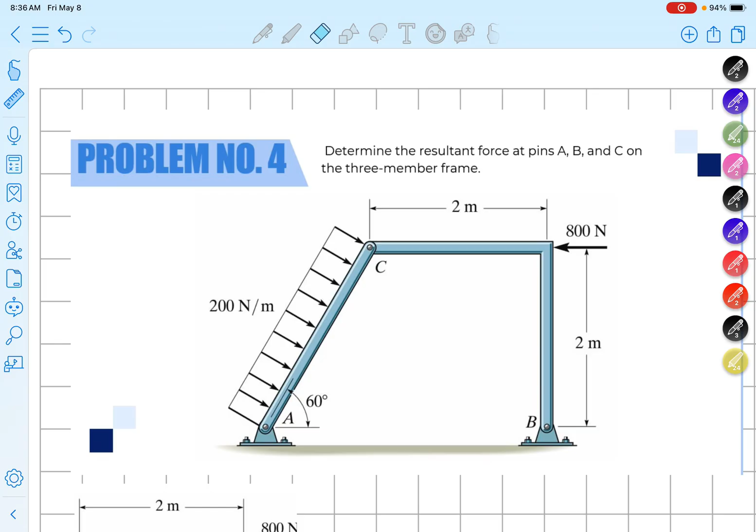If you look carefully, let's find first the 2-force members. In this case, is member CB a 2-force member? Actually no, because along its span there's an 800 Newton force applied. So technically, that's not a 2-force member.

How about member AC? Is this also a 2-force member? No, because along this length there's a 200 Newton per meter distributed load applied. So technically, that's not a 2-force member either.

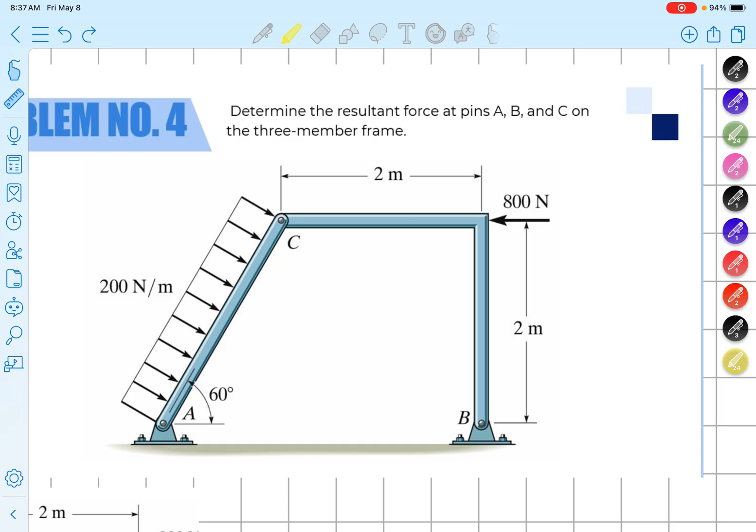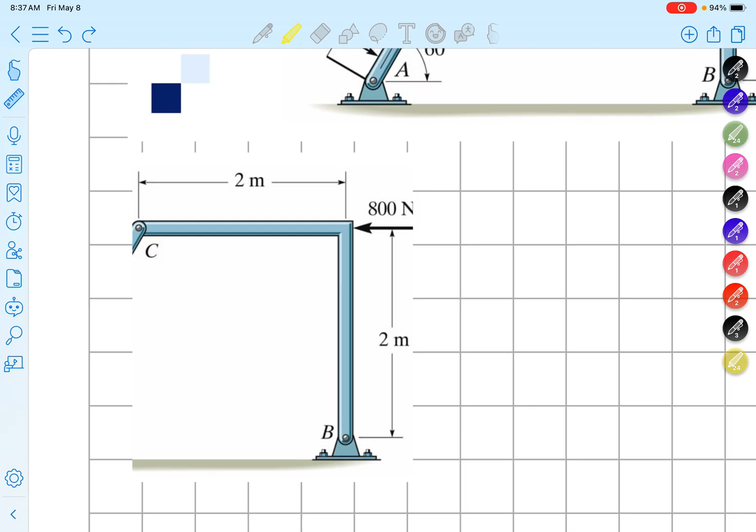Oftentimes guys, in the method of members, it's hard to analyze the direction of the support reactions because it depends on the loadings. So we're more on assumption. But always make sure that whatever you assume first, you assume the same in the next segment, but in the opposite direction.

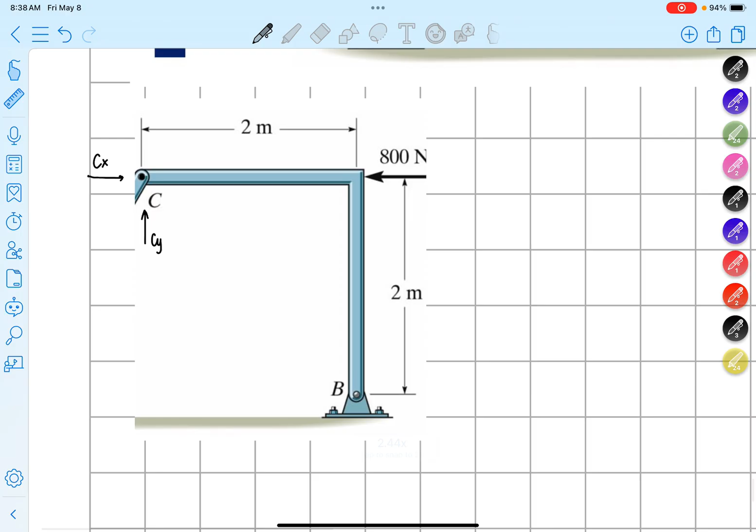RBY, let's say pointing upward. RBX, let's say pointing to the left. But this is pure assumption only.

So in this case guys, can we proceed now? Okay, so maybe we can now, so we can create our equations.

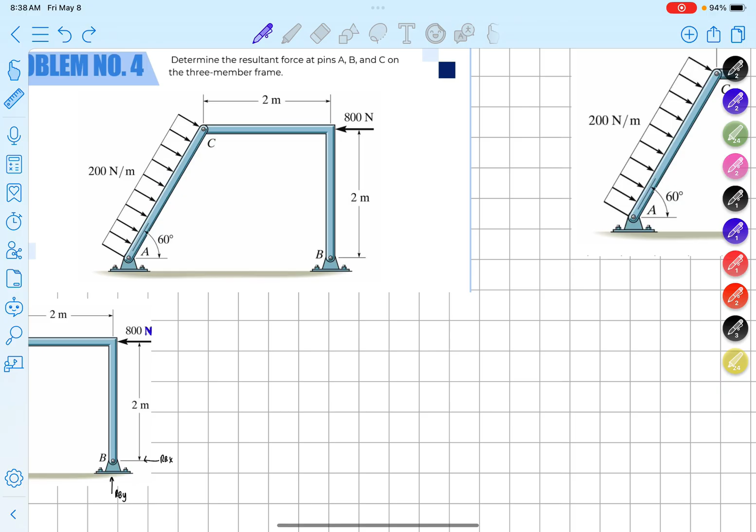Okay, so in this case, can we take the moment at B? Taking the summation of moment at B equals 0. Technically guys, let's consider clockwise as positive. So 0 is equal to...

CY, right? What's the moment arm? 2. How about CX? That's positive too since it's also clockwise, right? CX multiplied by 2. The 800 is negative 800, since that's counterclockwise, multiplied by 2.

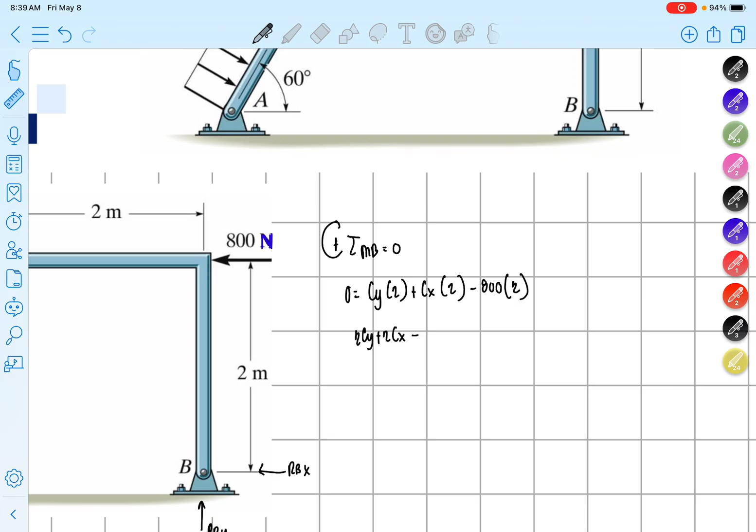So arranging the equations, this is 2CY plus 2CX minus - let's just equate it. Let's transpose this negative 1600, right? 800 times 2 is 1600. So that becomes positive 1600 on the other side of the equation.

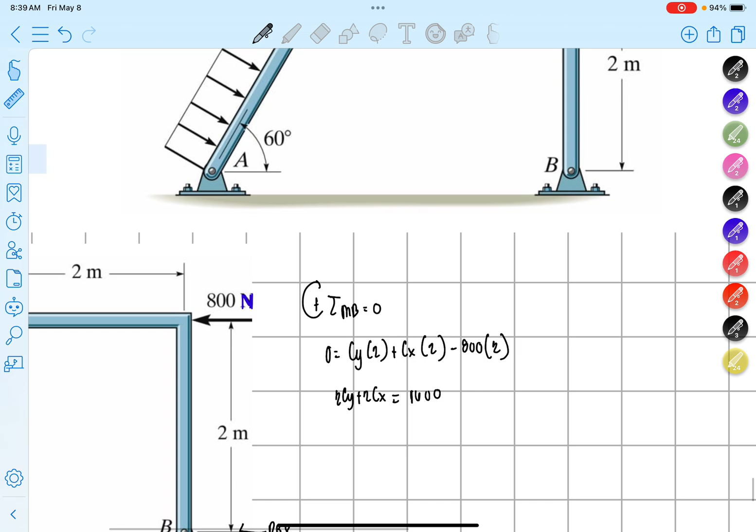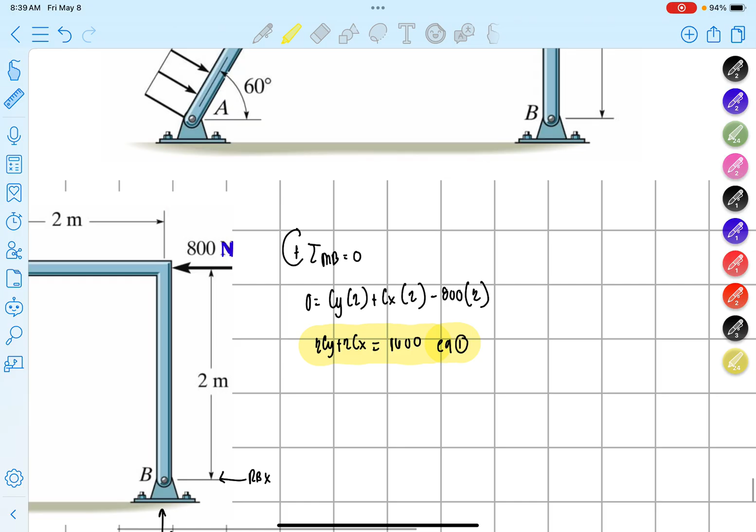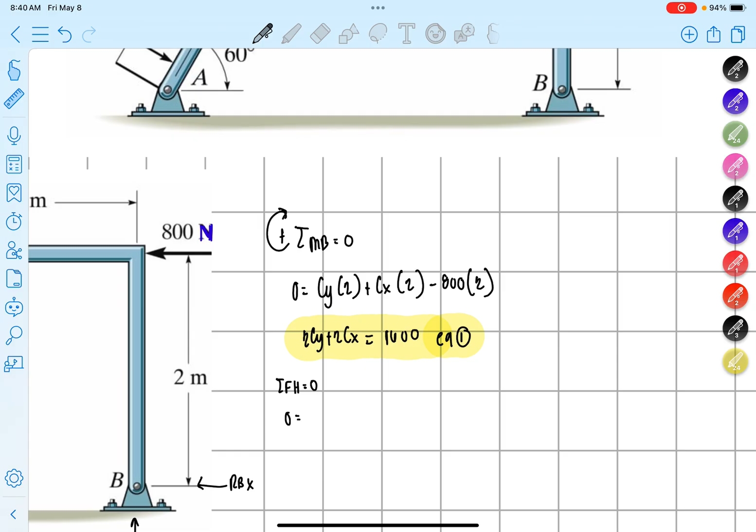Okay, next, we're done taking the moment. Now we have to take the summation of forces horizontal equal to 0. Which is 0 equals - what's involved there? We have CX, positive CX, minus RBX. Let's say minus 800, horizontal.

So in this case guys, we have RBX. If we solve for RBX, this is simply equal to CX minus 800. We just transposed, right? You can consider that equation 1, but let's simplify. So this is our equation 2, for example.

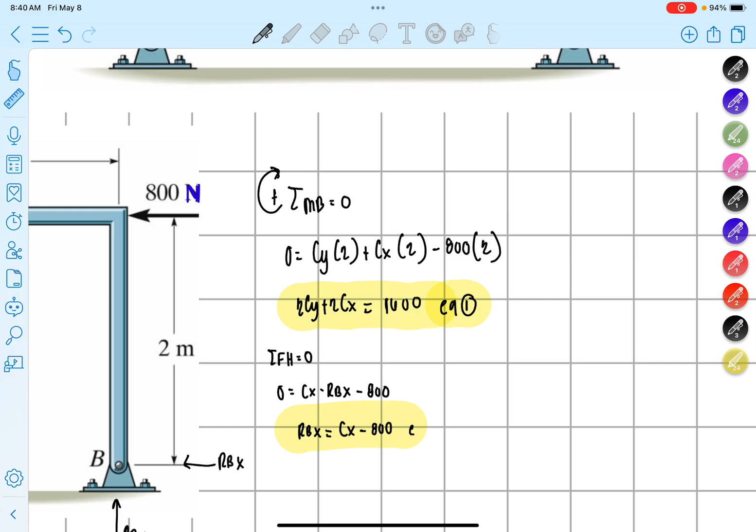Okay, next, let's take the summation of forces vertical equal to 0. Considering 0 equals RBY. Nothing else involved there. Plus CY. That's our assumption.

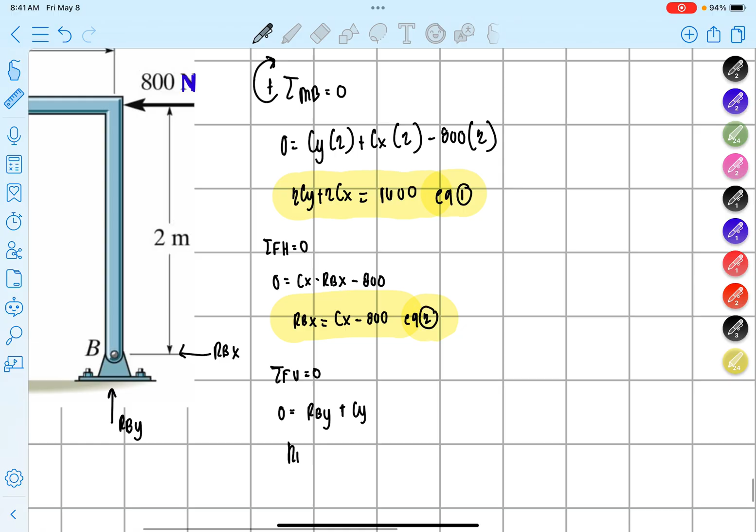Okay, so in this case guys, RBY is equal to negative CY. So that means this is our equation 3.

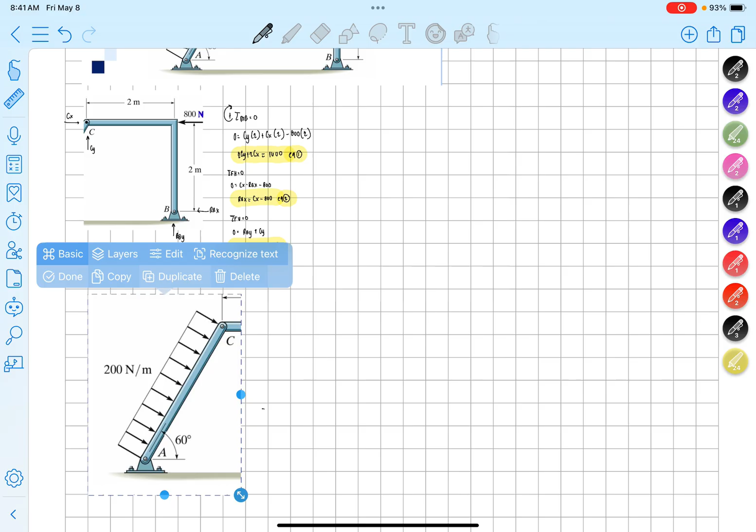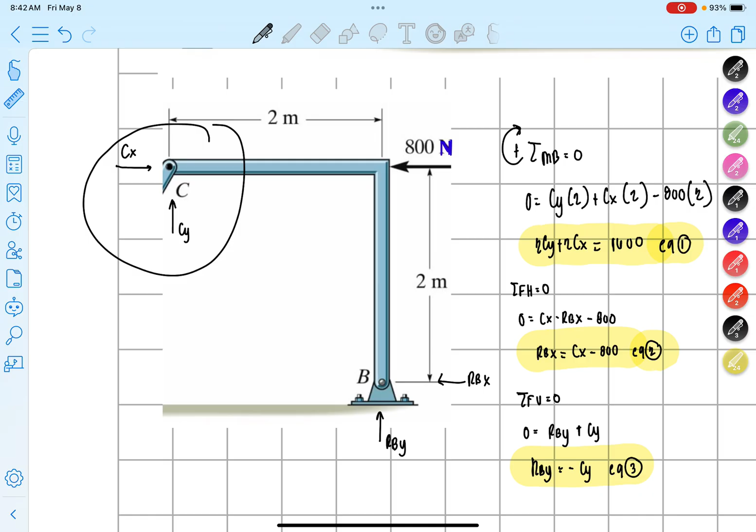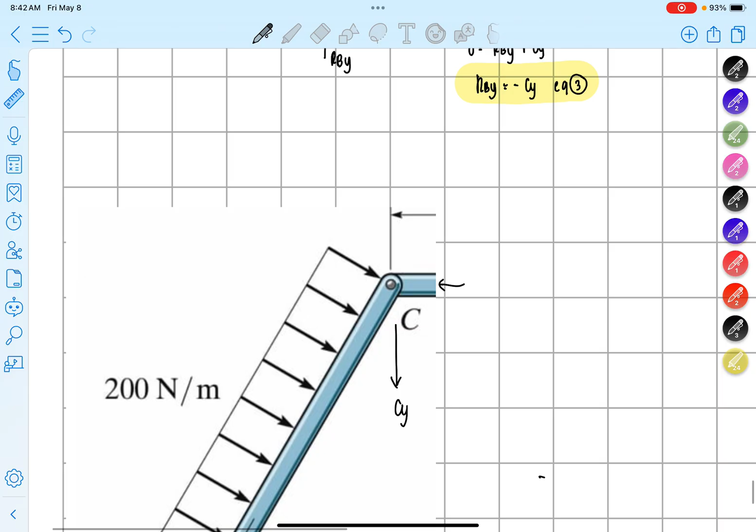So, in this case, ang sabi ko sa inyo kanina, kung ano inassume mo dito, kung ano inassume mo dyan, di ba, by transfer of loadings, ililipat mo yan sa kabila, dapat opposite in direction na yan. So, in this case, guys, pataas si CY, pakanan si CX. In this case, pababa si CY, pakaliwa si CX. Tama? Nagkakaintindihan?

Ngayon, eto na. Dito na medyo magkakagulo. Meron kasi nagtanong sa akin, Sir, bakit po ba, wait lang, ayusin ko lang si CX. Sir, bakit po ba yung naka-incline na loadings na ganun, bigla na lang, hindi na po natin kinomponent, bigla nyo na lang pong times sa distance.

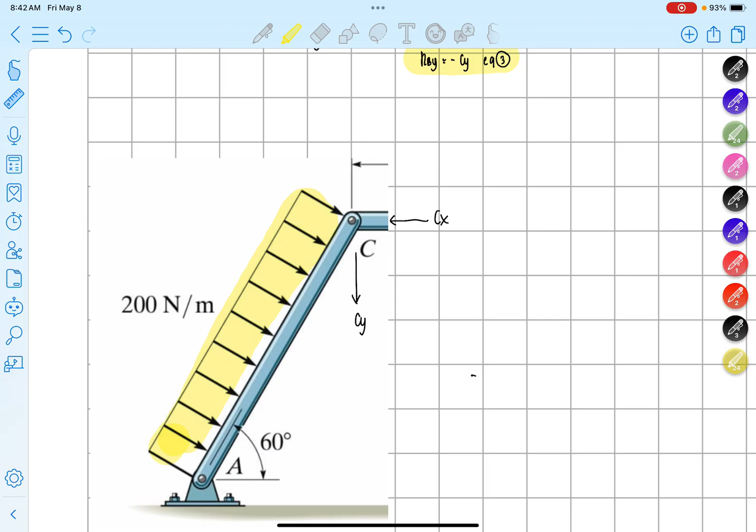So, etong load na yan, makinig etong load na to, di ba area lang yan? So, ibig sabihin, ang height ng area na yan is etong 200 Newton per meter. Ang magiging base niyan, technically, is eto dapat.

Yan, distance na yan. Ngayon, para makuha natin yan, ano ba yung height na to? Tapos, ano ba yung base na to? So, kunin natin yan. So, ibig sabihin, may height ka doon na 2 meters, di ba? Meron kang 2 meters. So, pagpalagay natin, this is your 2 meters.

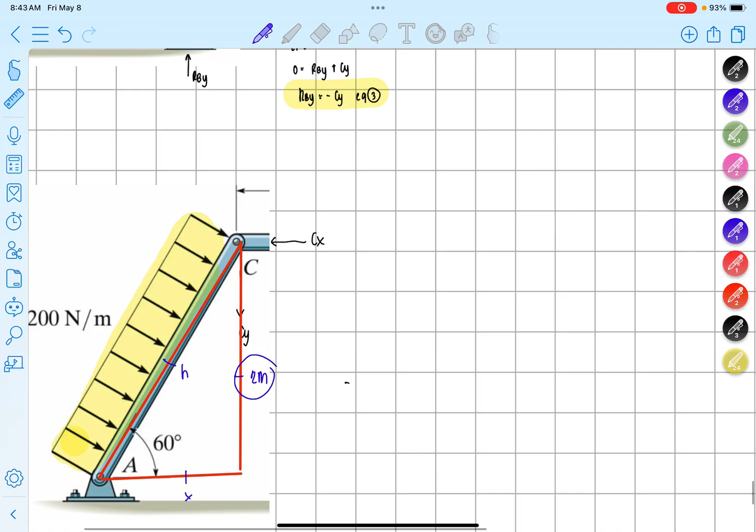Ito ngayon si X, hindi natin alam yan. Ito ngayon si H na lang siguro. Okay? In this case, guys, isolve natin si H saka si X. Pagka sinolve natin si X, di ba, meron tayong opposite, may angle tayo, at saka meron tayong adjacent. So, technically, that's sine. Okay?

So we have sine of 60 equal to opposite na 2 over, wait lang pala. H pala yung makukuha natin dyan. So, sorry. So, we have this sine theta opposite over adjacent H, over the hypotenuse H. So, we have the H.

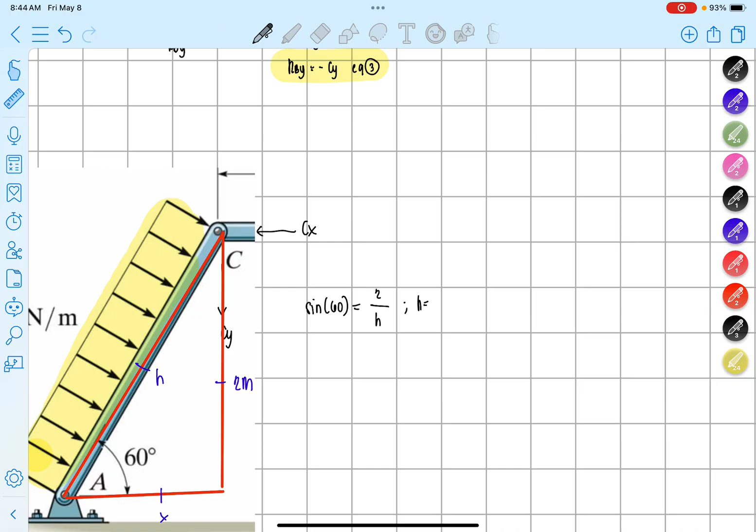So, lang yan. This is opposite ng angle. Ngayon, makukuha natin si H equal to, let's say, mangyayari dito is we have 2 divided by sine of 60. So, this is 2.31. So, this is 2.31 meters. So, this is equal to 2.31 meters.

Ngayon naman, para makuha natin si X, di ba ang gagawin natin, meron tayo, if this is your opposite, this is your adjacent, anong gagamitin natin? So, we have TOA. So, we have tangent of 60 is equal to 2 over X naman. So, yung X naman natin dito is equal to 2 divided by tangent ng 60.

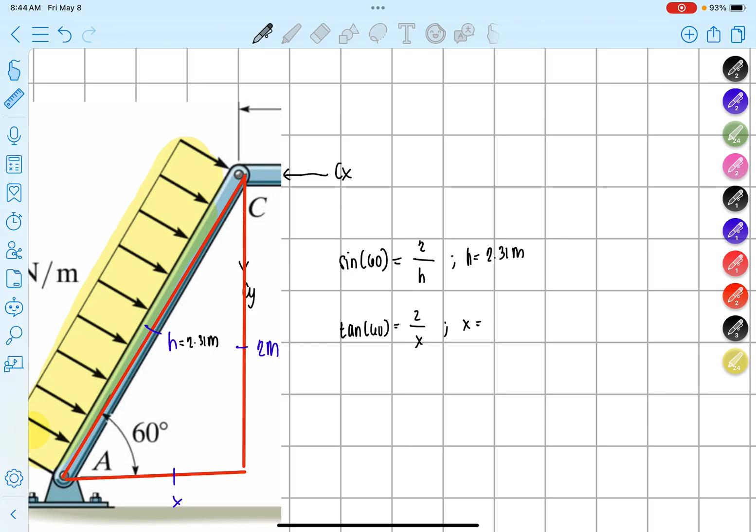This is equal to 1.155. So, let's say 1.15 na lang. 1.15 meters. So, this is equal to 1.15 meters. So, in this case, okay na tayo.

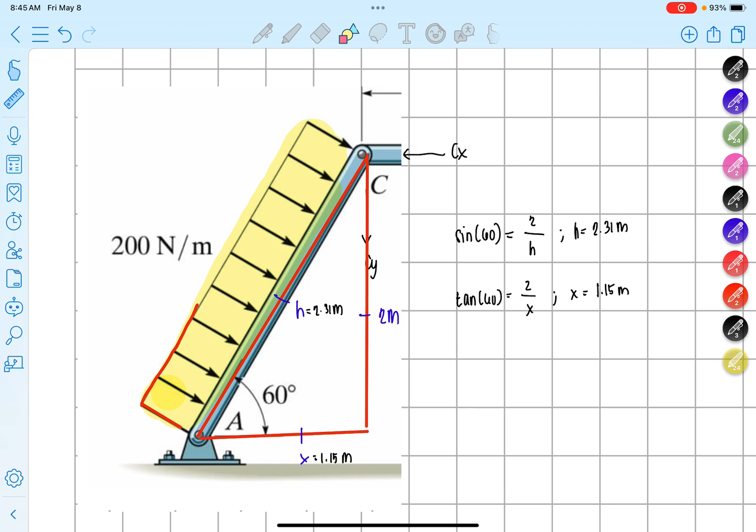Meron na tayong, ngayon, hindi ba guys, that yung resultant nga na to, tulad ng sinasabi ko, di ba yung resultant na to is simply just the area? Di ba area lang yan? Like guys, lagi tatandaan na nakapaling lang yan. Pero yung height niyan is ito pa rin yan, 200 Newtons per meter. Meaning ba, sir, pag kinuha ko yung area niyan, yung magiging resultant ko ba is nandito?

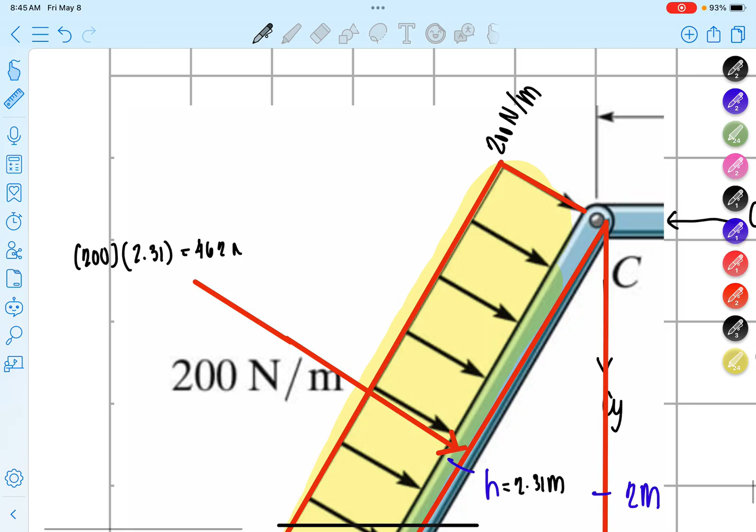Yes guys, nandyan ngayon yan. So, ibig sabihin pala, para makuha natin resultant, kunin lang natin area, we have 200. Ano yung magiging base niya na nga? Yung H natin bale, which is 2.31. So, this is equal to 200 times 2.31. This is equal to 462 ngayon. This is 462 Newton. So, yan yung resultant natin for that uniformly distributed load.

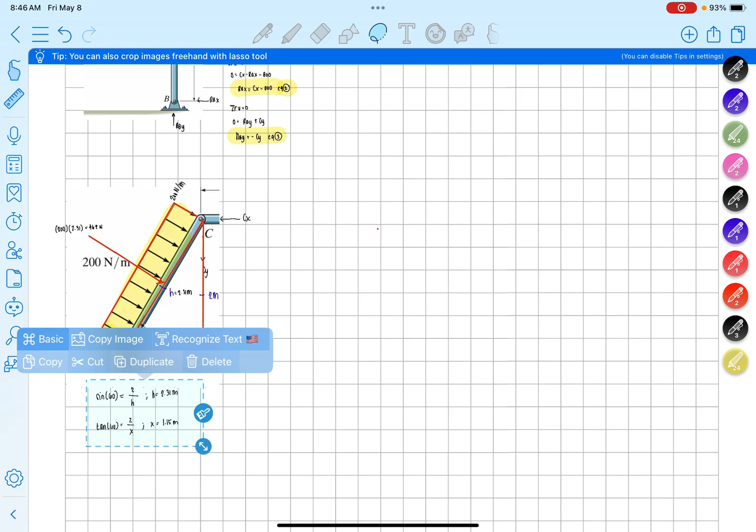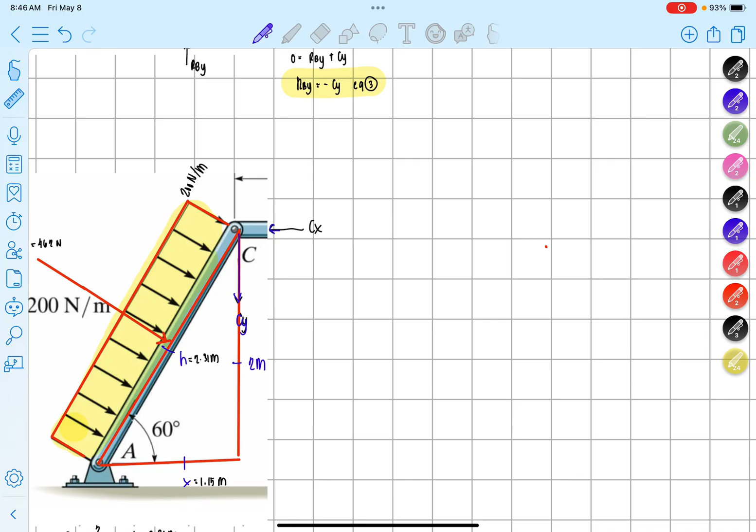So, okay na tayo dyan. Okay? Siguro, ilipat ko lang to para makapag-take na tayo ng moment. Pakita ko lang dyan para hindi ko naman din aalisin. So, para makapag-take na tayo ng moment, nawala pala yan ako dito. Wait lang. This is your CY and this is your CX. Ayan na, ayan yung CYCX natin.

Now, if we're going to take the moment at A, okay, if you're going to take the summation, moment at A equal to 0. Ito naman, mag-assume tayo ng direction dito. I-assume ko na lang siguro na pag ganun din, we have the RAY. Ito maganda rin naman, pakita ko na yung ina-assume lang din.

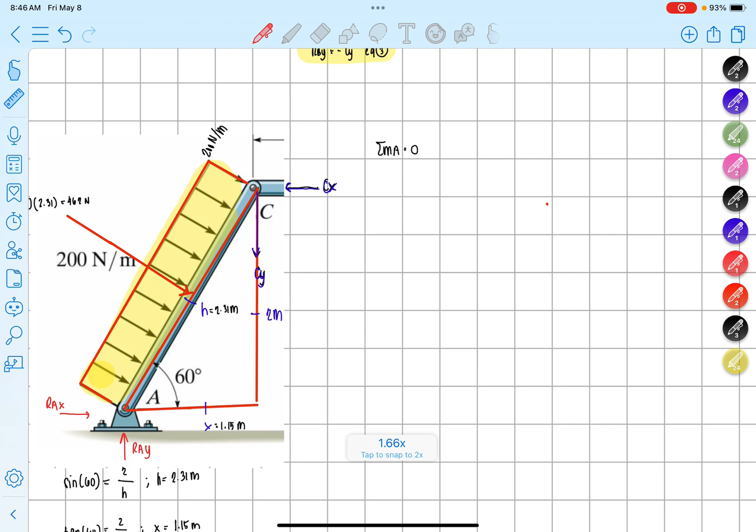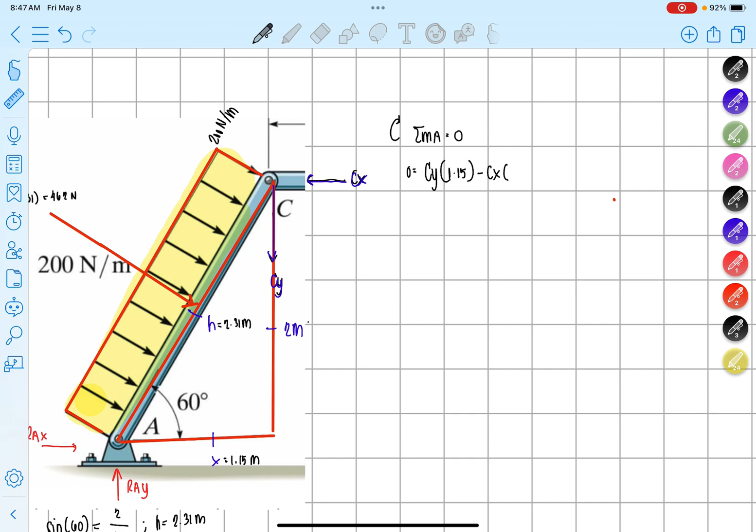RAX. So now, kapag nag-take tayo ng summation moment at A is equal to 0, considering clockwise positive, regardless kung ano man yung piliin nyo dyan, okay lang. So 0 is equal to CY, multiplied by a moment arm ng CY ngayon na 1.5... tama, so we have 1.15 pala. How about the CX? Si CX is iikot pa kabila, therefore negative CX multiplied by distance na 2.

Okay, now how about yung ating 200 Newtons per meter? Diba nakuha na natin guys na 200 Newtons per meter is 462 yung resultant. Ang gamitin na lang natin guys na perpendicular distance is eto, ibig sabihin kalahati po ng 2.31. Yes, kalahati ng 2.31. Since iikot yan clockwise, so positive 462, nakuha na natin resultant ton, multiplied by 2.31 over 2. So this is equal to, masolve ba natin?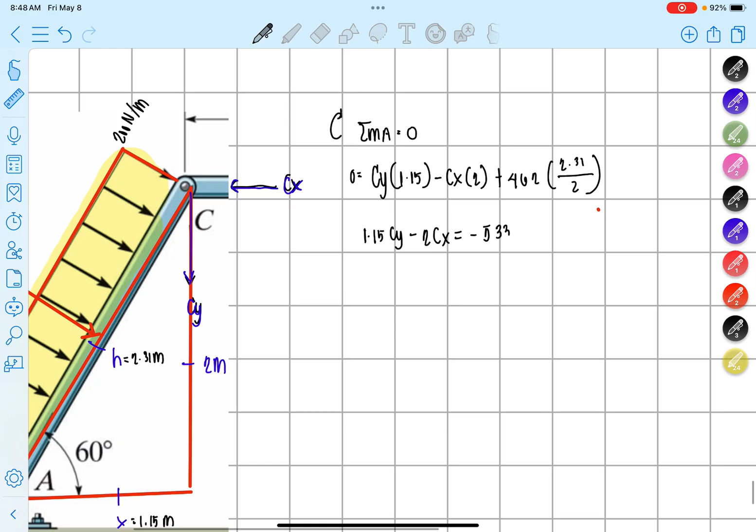So hindi pa pala, so we have 1 point, if we're going to simplify, we have 1.15 cy minus 2cx. Tapos lipat natin sa kabila na equation yan, magiging negative yan. So we have 462 times 2.31 over 2, this is equal to 533.61. Since nilipat natin siya sa kabila ng equation, ang tendency niyan pag negative na yan, so negative 533.61. So this is our equation 4. Equation 4 na. Ilan pa ba equation yan?

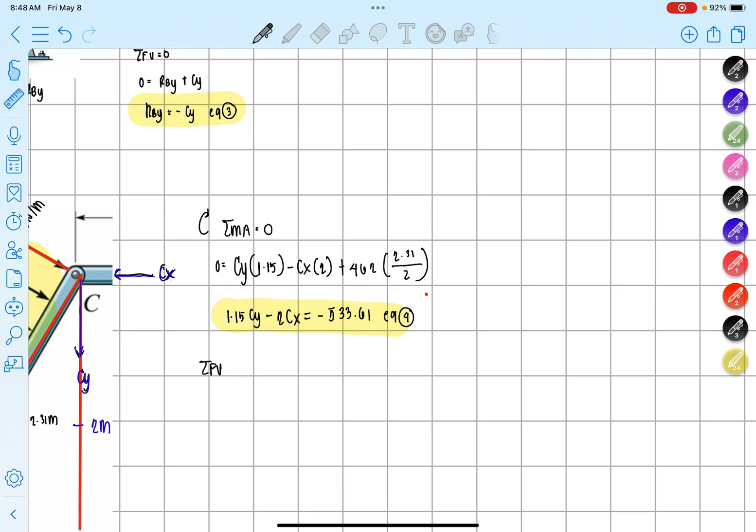So patience, okay mabilis na lang to pag nayari na natin. Ibig sabihin, next naman is summation forces vertical is equal to 0. 0 is equal to, ano yung mga nandyan? So we have RAY positive, tama, minus CY, tama ba? Ngayon sir, diba magkakaroon po ng components to?

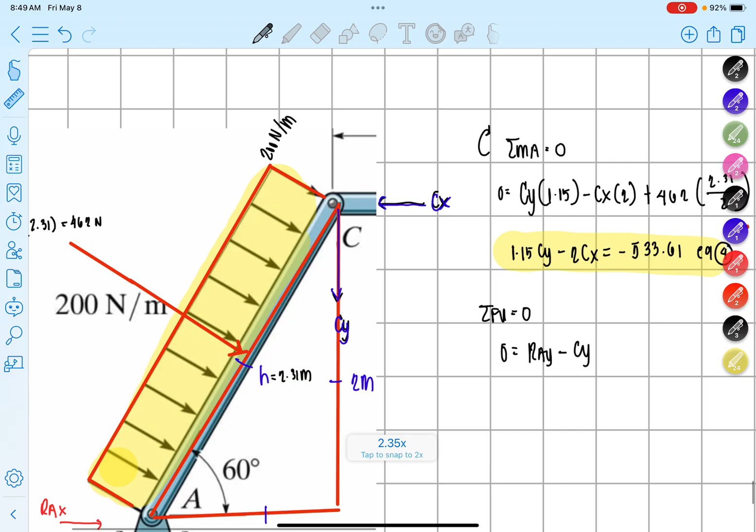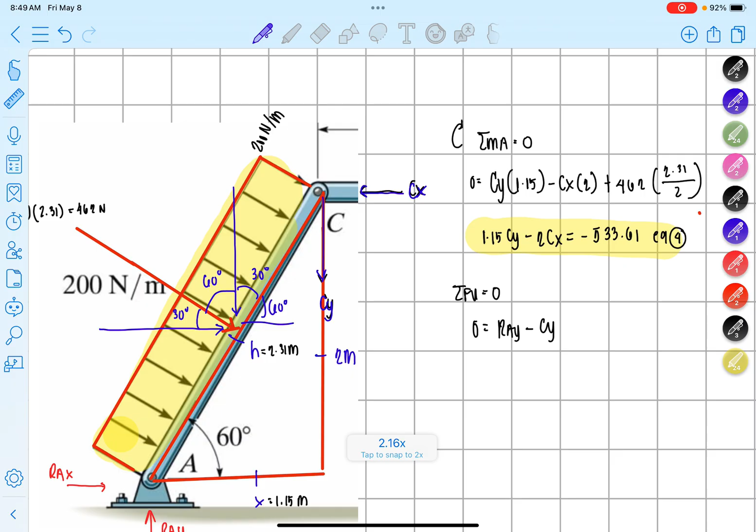Tama? So ibig sabihin, kukunin lang natin yung vertical component nung uniform distributed natin na yan. Meron naman tayong 462, pababa, minus 462, tama? Sine of 30 tayo ngayon. Tama? So okay, para hindi na kayo mahirapan, i-set ko na to as equation 5.

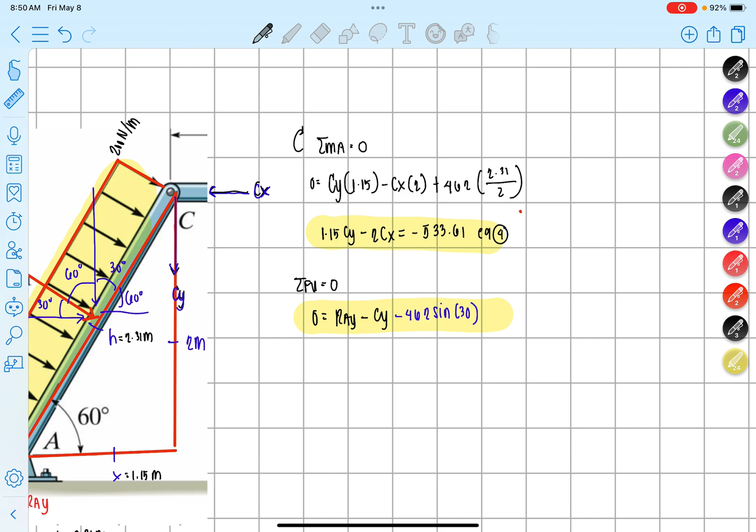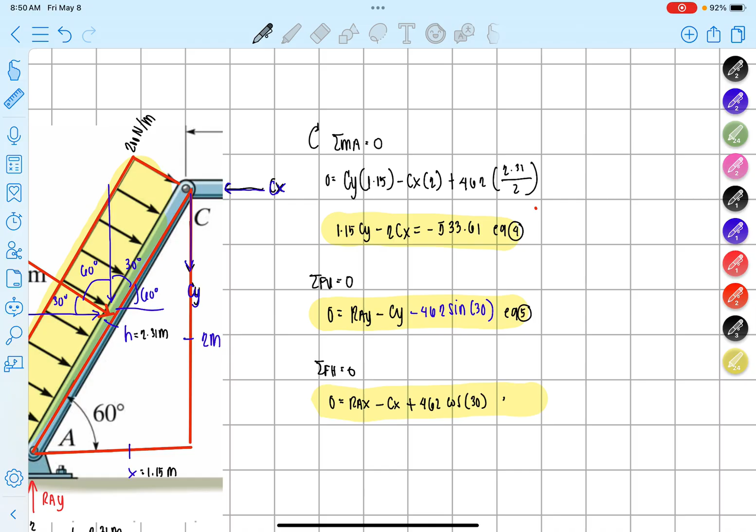Now, for summation forces horizontal is equal to 0, 0 is simply equal to RAX na pakanan minus CX and then minus or plus 462 cosine of 30. In this case, highlight ko lang ulit, this will be your equation 6. Dami hanip, no? Sabi sabihin, okay na tayo ngayon dyan. Naka-extract na tayo ng mga equation. Ayan na, pwede na tayo guys.

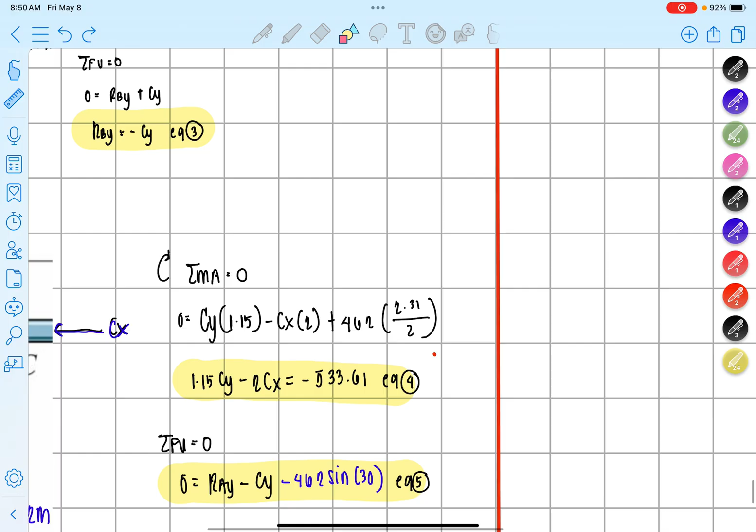Kung mapapansin nyo, magme-make sense na yung ating solution dyan. Ngayon, solve simultaneously natin. Kung mapapansin nyo, itong equation 1 natin, nawawala CY, CX. Si equation 4 naman natin, CY, CX lang din, tsaka may constant. So pwede para natin i-solve simultaneous. Okay? Solve equation 1 and equation 4.

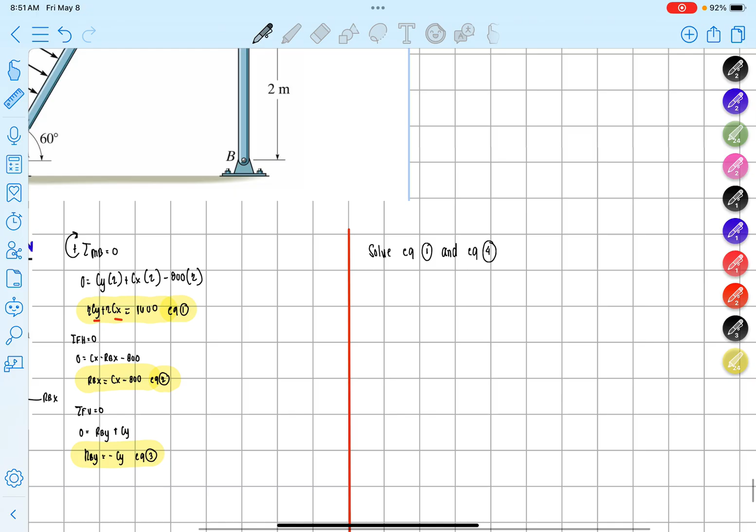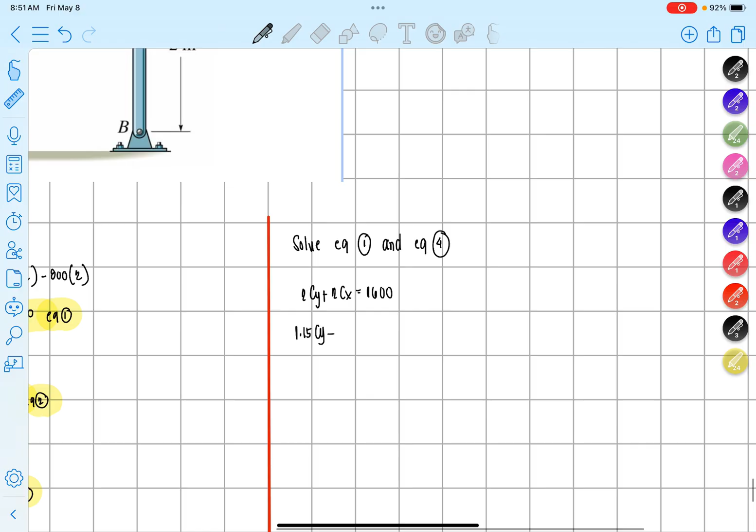Okay, so ibig sabihin, sa equation 1, rewrite natin, this is 2CY plus 2CX is equal to 1,600. That's for equation 1. Tapos we have for equation 4 na, 1.15 CY minus 2CX is equal to negative 533.61. Tama ba?

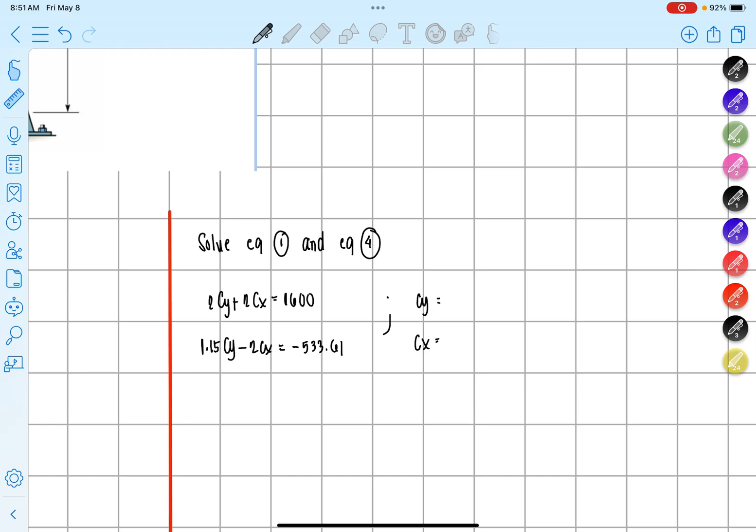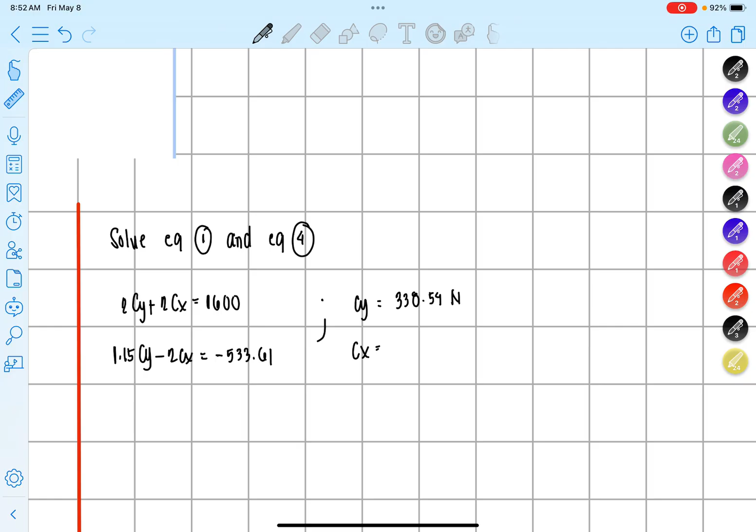In this case, masosolve na natin si CY and si CX. So kung titingnan nyo, diba, we have mode 5, 1 na lang gamitin natin. We have 2, 2, and positive 1,600. And also we have 1.15 minus 2 naman, and then negative 533.61. Ang lilitaw sa atin dito is 338.54. So ang CY natin is 338.54 Newton ba to? Yes, Newton. And then for CX natin, ang lilitaw dyan is 461.46 Newton. In this case, parehas positive, therefore tama yung naging assumption natin ng direction. Pero kung titingnan nyo, kung kukunin natin si C dyan, yung pinakasagot natin, diba this is square root pa ng 338.54 square plus 461.46 square.

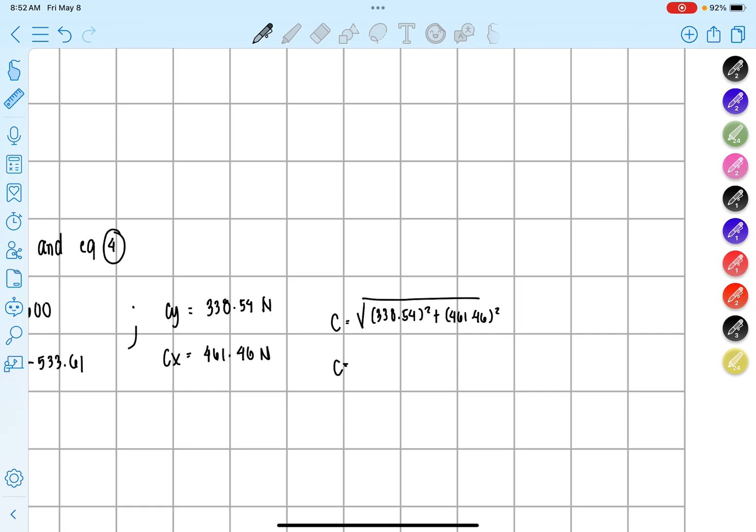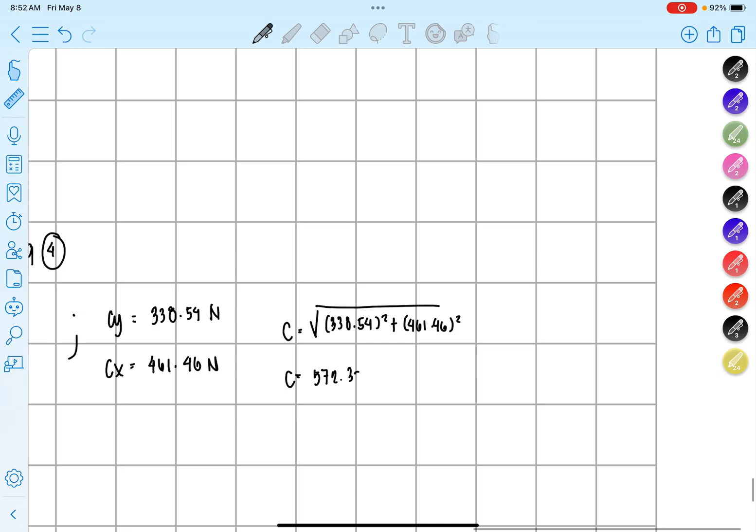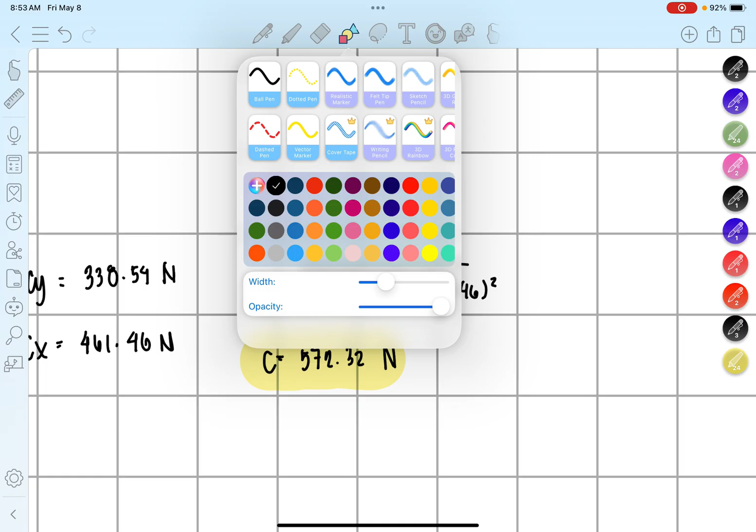So for C natin, we have mode 1, 338.54 squared plus 461.46 squared. Ang lilitaw sa atin dito is 572.32 Newton. Baka kasi nalilito kayo guys. Pagka nagkaroon ng component, hinahanap yung resultant ng support reactions, lagi nyong kukunin yung pinaka-resultant niya. Tama ba? Pag hindi mo kinuha, mali yun. So ito yung final answer natin for reaction at C.

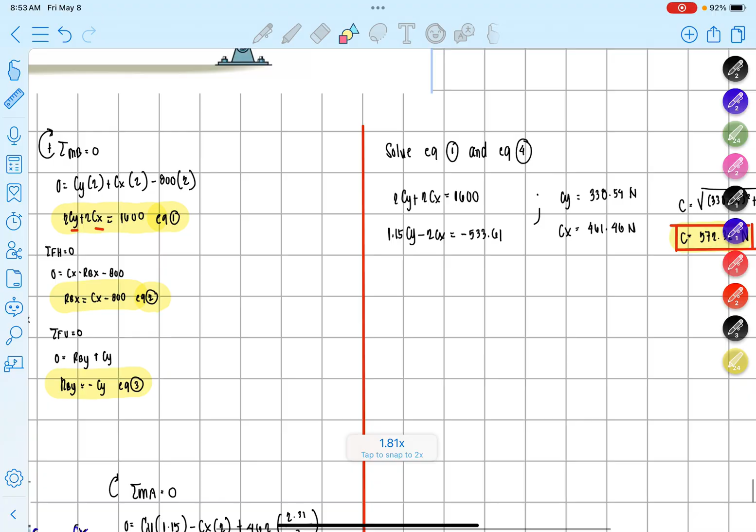Now okay na tayo sa CX saka CY. Dito muna tayo, isa-isahin natin. RB muna. Pagka nag-RB tayo guys, technically meron tayong CX, meron tayong CY for equation 3. From equation 2 naman.

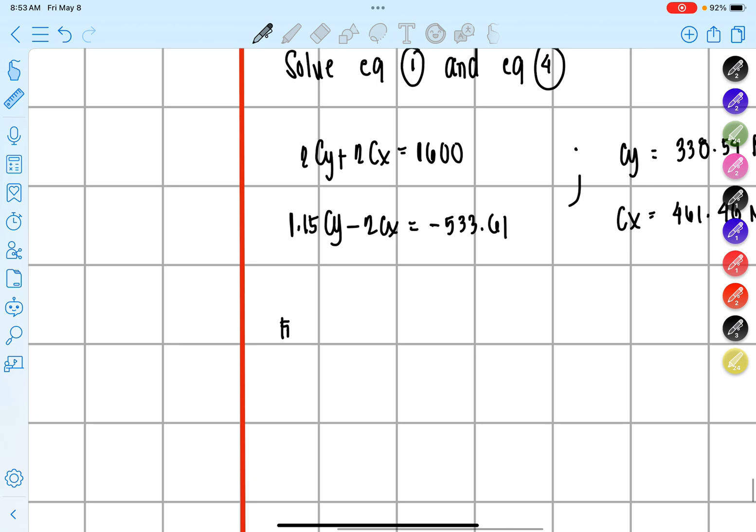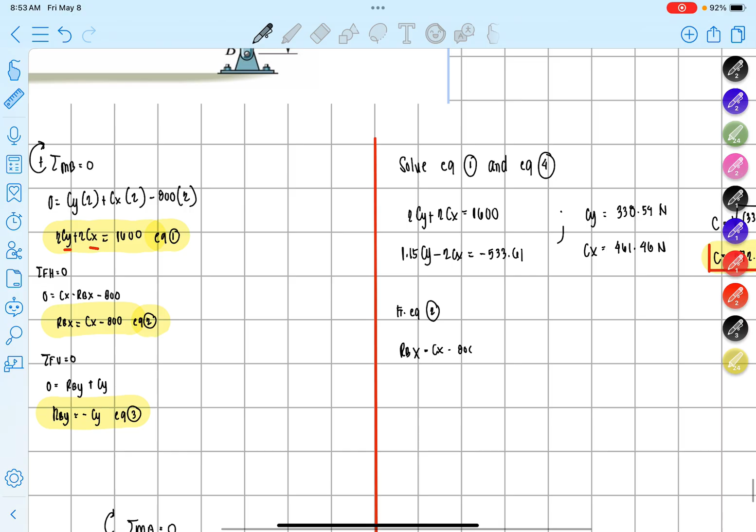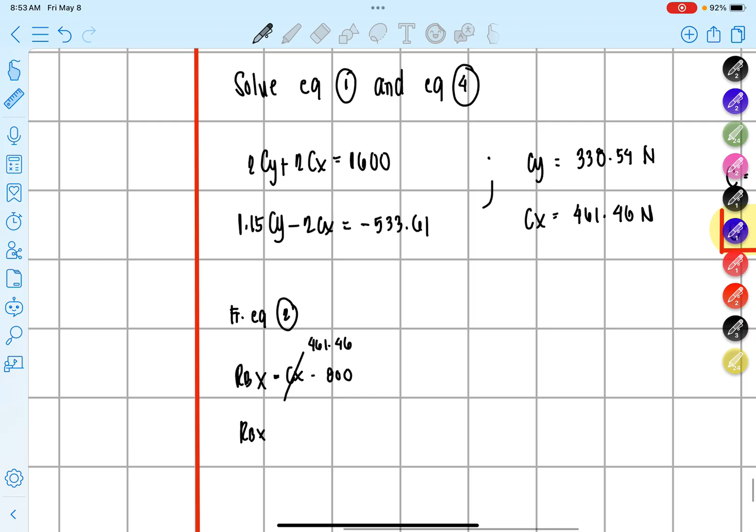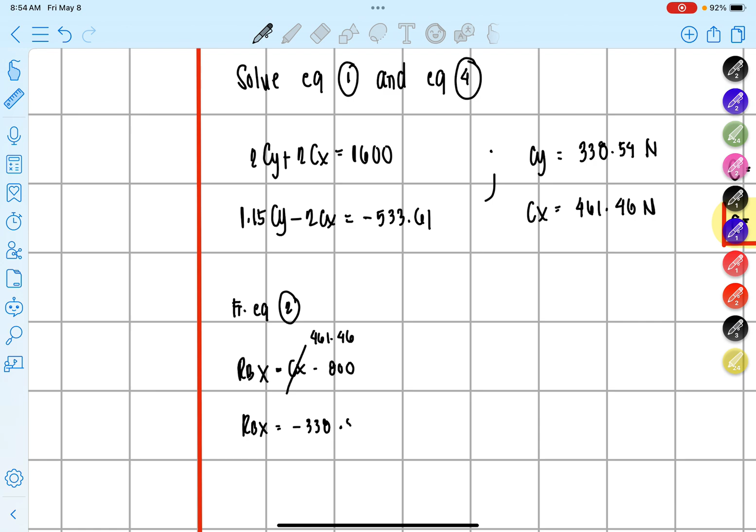From equation 2, we have RBX is equal to CX minus 800. So ibig sabihin, palitan lang natin si CX. Si CX is positive, we have 461.46. So ibig sabihin, si RBX ngayon is equal to 461.46 minus 800. So this is equal to negative 338.54 Newton. Mamaya natin itama yung ano.

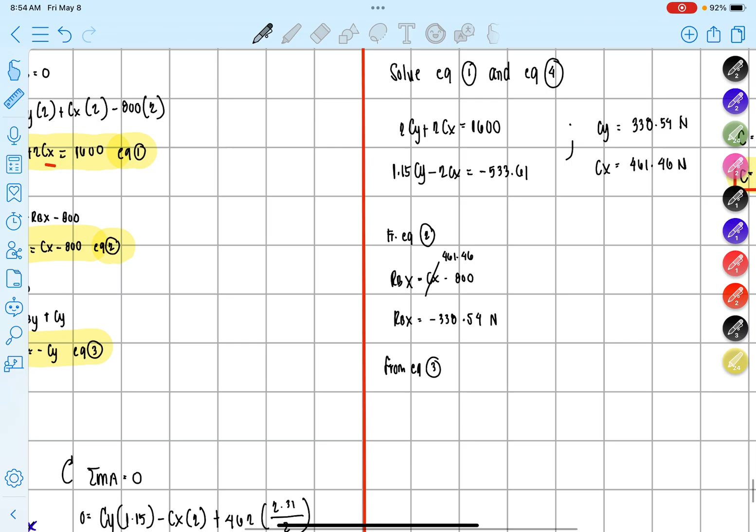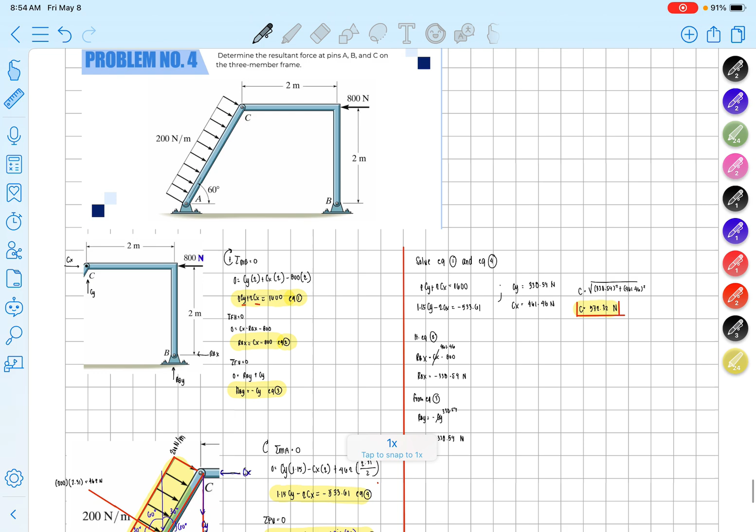And then for the RBY naman, from equation 3, si RBY naman is negative CY. So ibig sabihin si RBY is equal to negative CY. Ano ba yung CY natin? CY natin is 338.54. So ibig sabihin si RBY is equal to negative 338.54 Newton. Kung itatama natin yan, mali assumption natin sa RB, parehas mali kasi parehas nag-negative. Ibig sabihin, ang assumption natin dito is pa-left, ibig sabihin nag-negative, pa-kanan pala yung tama. Ito naman is pataas, mali pala. So ibig sabihin, pababa pala yung tama.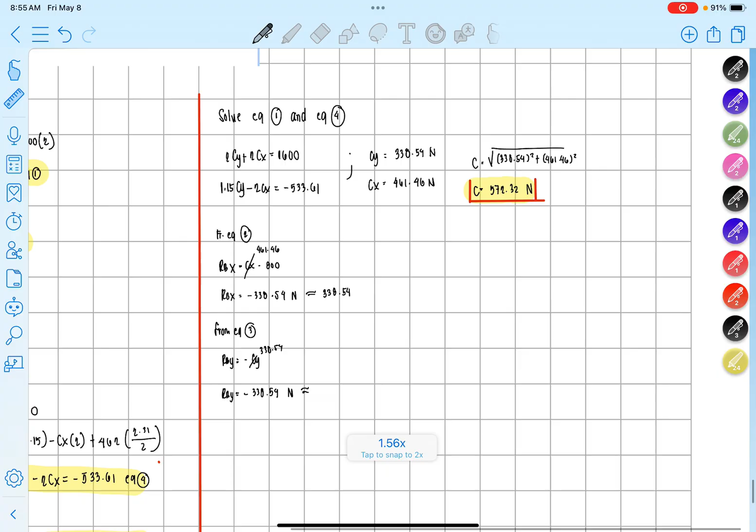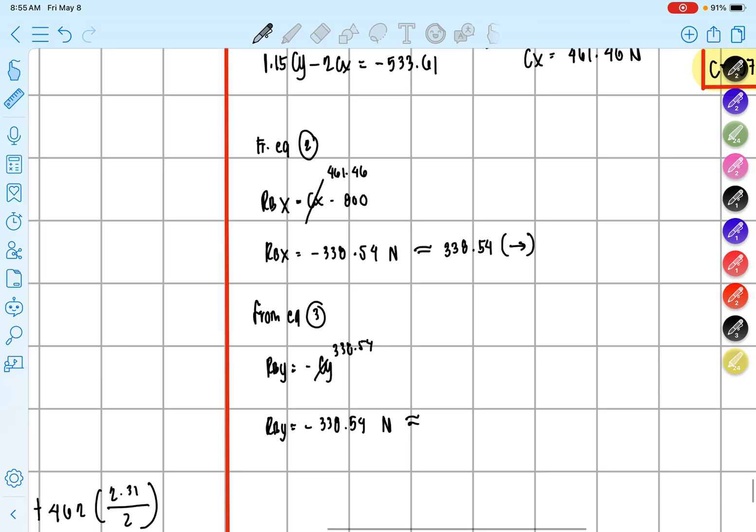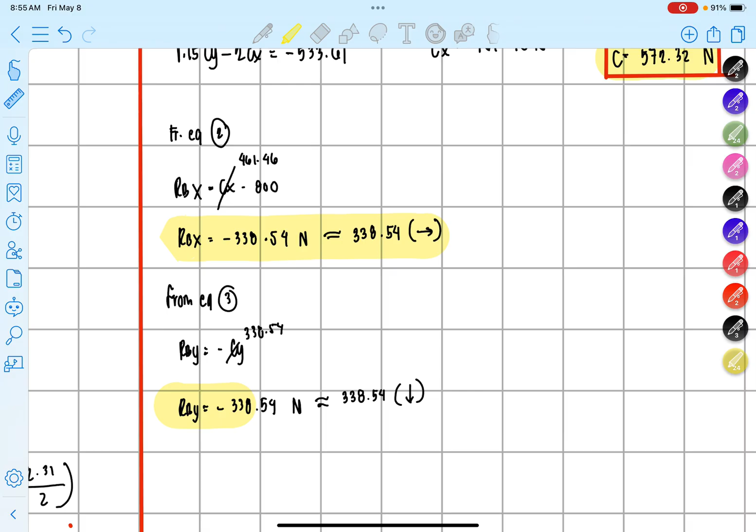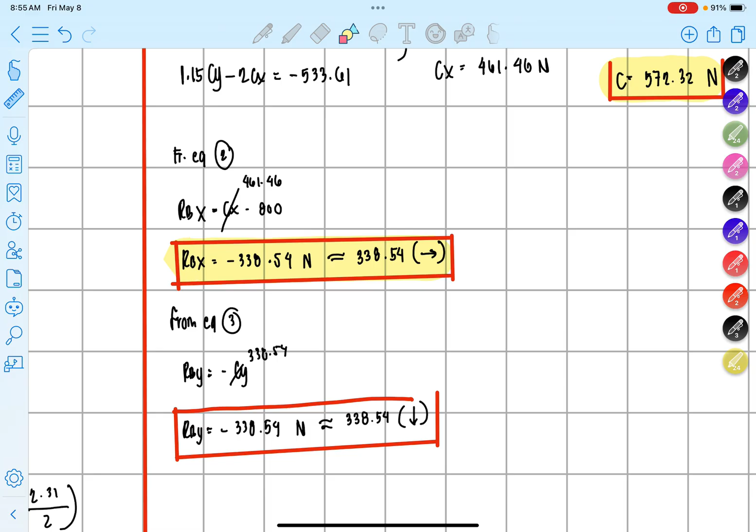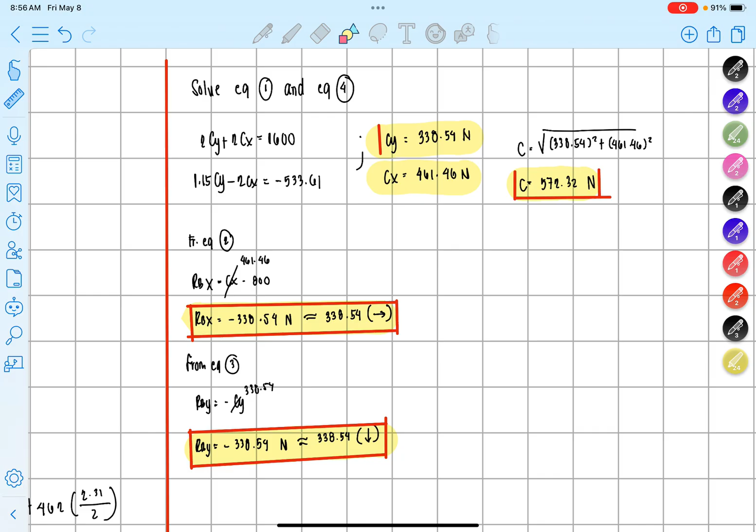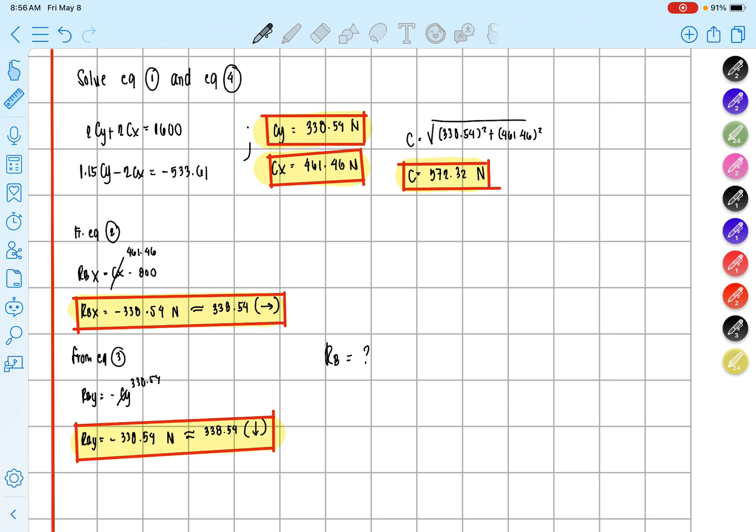Next, okay na tayo, no? Teka lang pala. By the way, ito, isama ko na yun, i-box. Pero meron pa tayong kulang for RBX and RBY. Alin yun? Yung resultant nilang dalawa. Sige nga, tingnan ko nga kung pinanonood nyo talaga yung video natin, isa-isa o sini-skip nyo lang. For your assignment nga, hanapin nyo tong RB. Sabihin yung resultant ng dalawa. For your assignment, hanapin nyo nga ito. This is your RB. Sabihin, ano yan? Square root ng RBX square plus RBY square. So kung hindi nga, hanapin nyo nga yan. Titingnan natin kung talagang sinasolve nyo. Same with the RA.

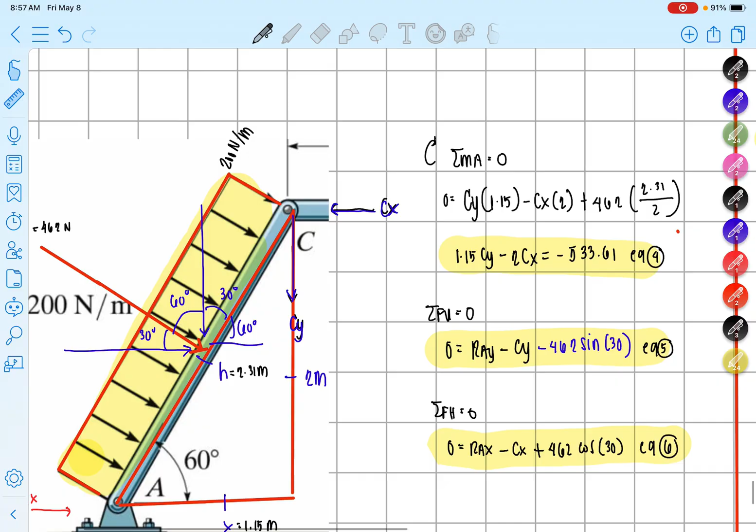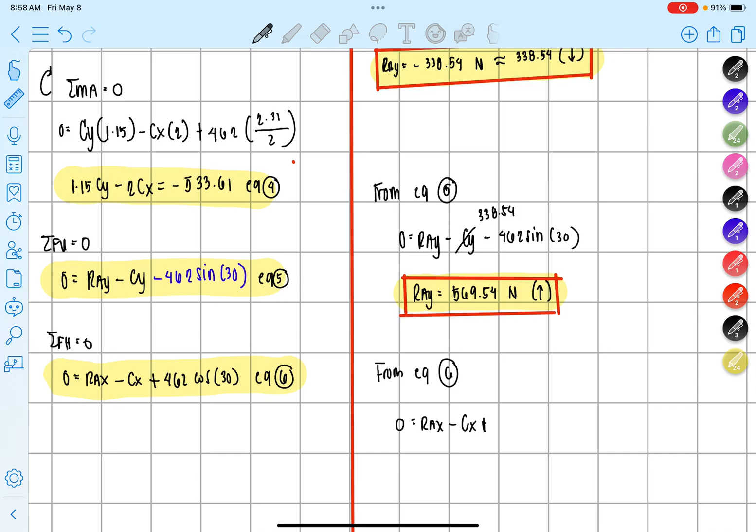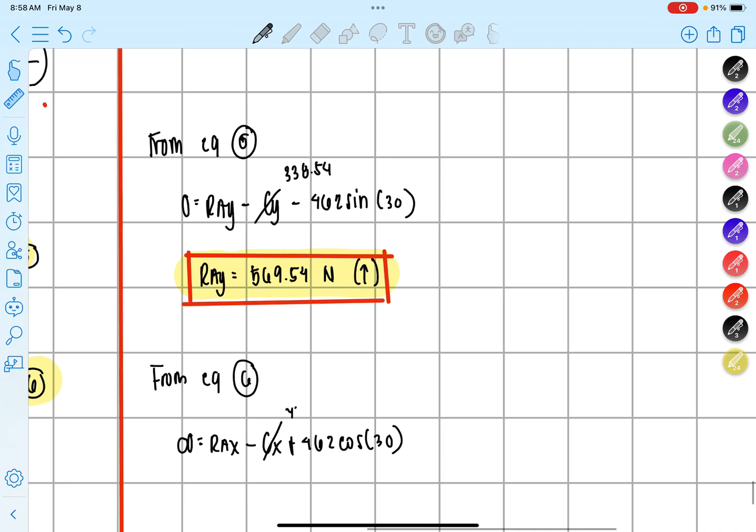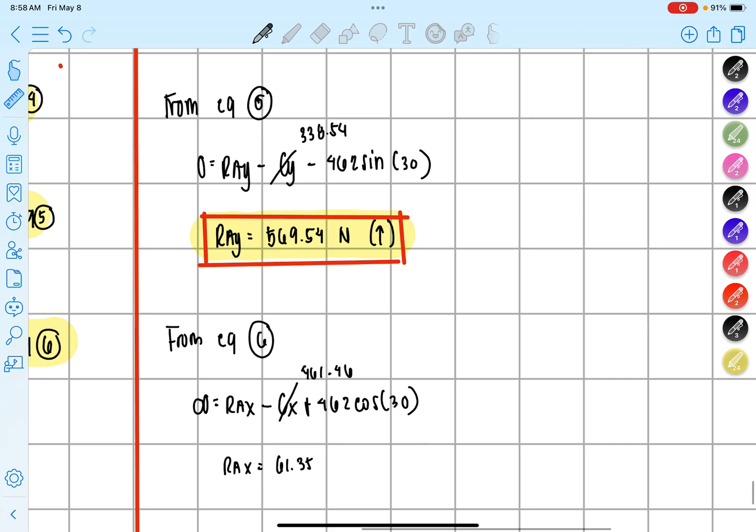For RAX naman, okay, so okay na tayo dito. Sabihin, ayan. And then summation from equation 6 naman, we have 0 is equal to RAX minus CX plus 462 cosine of 30. In this case, si CX natin is equal to 461.46. Therefore, si RAX is equal to 61.35. Tama yung assumption natin, pakanan natin assumption natin doon.

Diba ang sarap pag tama yung pag-assume? Diba? So yun lang, wala lang. Sinasaktan ko lang kayo.

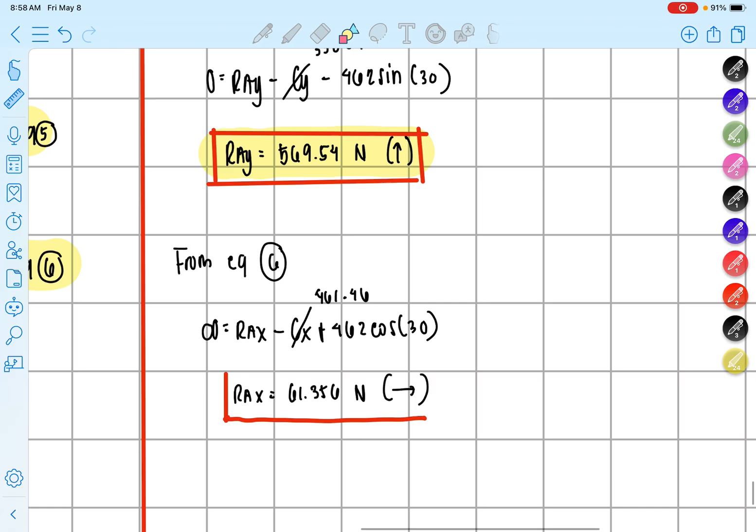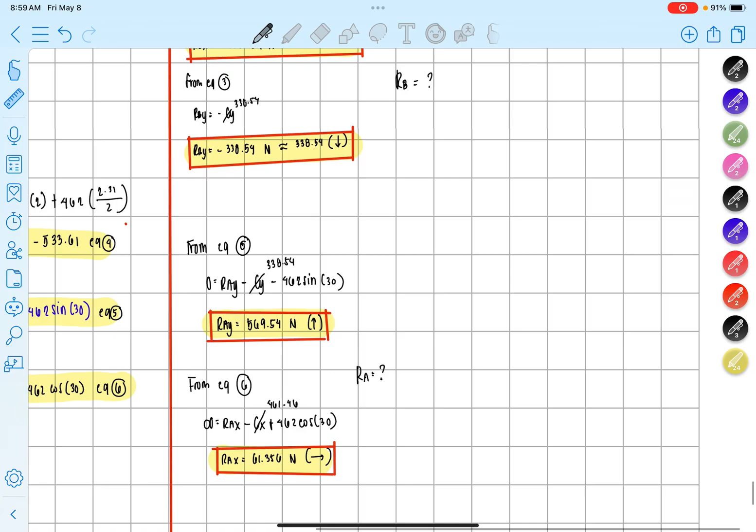So ibig sabihin, ayan yung RAX natin. O sige nga, kung nanonood talaga, aabangan ko to dapat sa Lunes kung sino una makakapagpakita sa akin ng resultant ng RB saka ng RA. Ako na bahala, titignan ko lang kung pinapanood nyo talaga. So technically, kailangan nyo kunin yung resultant ng RBX saka RBY and then ito namang RAY saka RAX. Sige, that's for sample problem number 4.